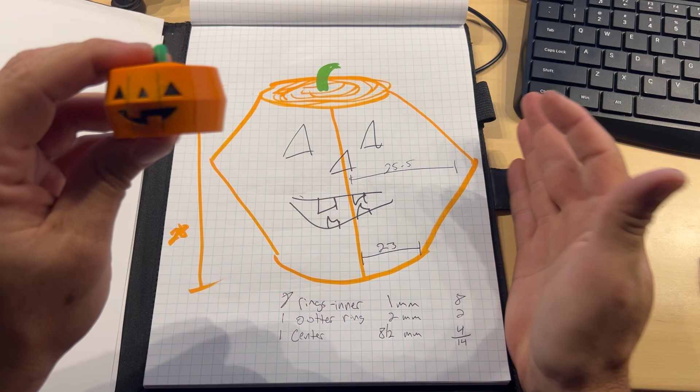First of all, I am no artist, obviously. So just some basic measurements from here: it's 28 millimeters tall, total width was 51 millimeters.

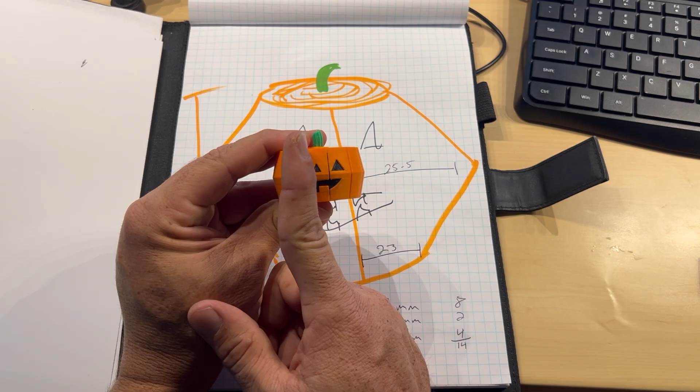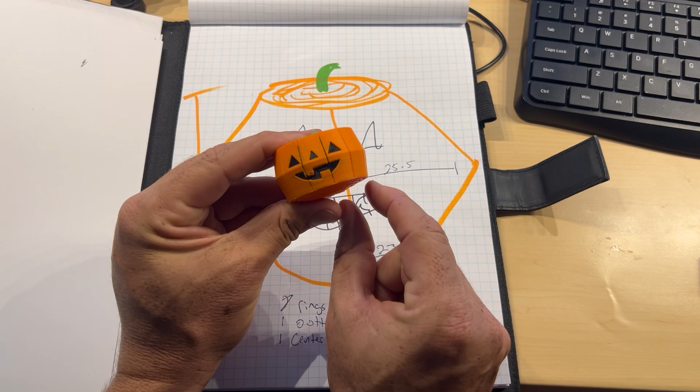We're going to be working on just a half, and I'll show you on the next page how we're going to build this thing out. But we're just going to need radii - I don't know what you call them. Middle is 25.5, bottom and top are 23.

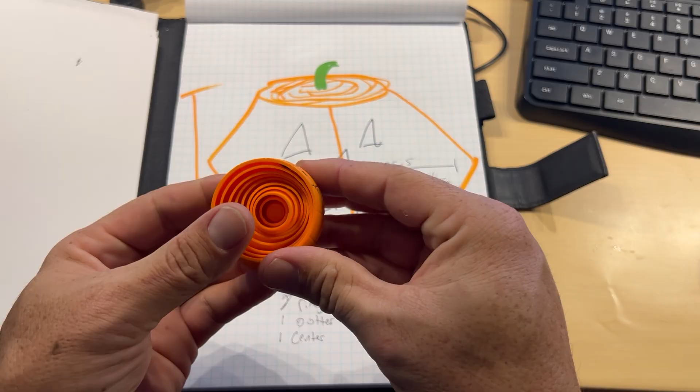Each of the 8 rings - it's got 8 inner rings. Let's look at it from the bottom. There's a center post, which is thicker, and that's also what the stem is connected to. And then there's 8 inner rings and then an outer ring.

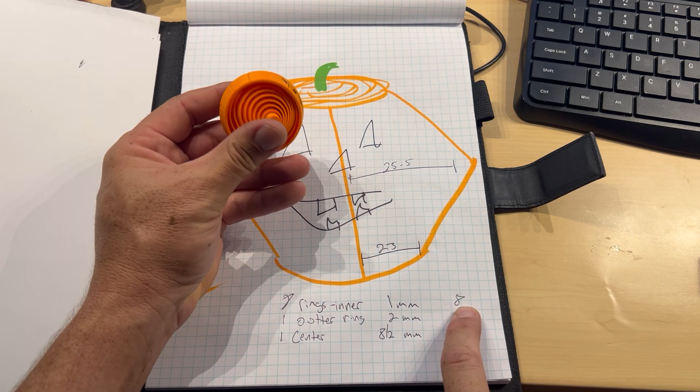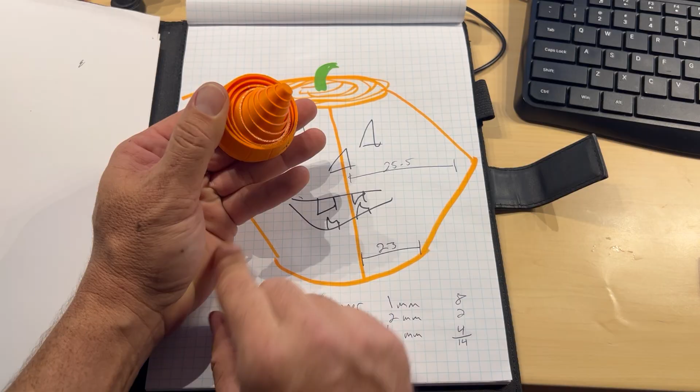I'm making a differentiation because it is thicker. So the 8 inner rings are 1 millimeter each, for 8 millimeters total. 1 outer ring, 2 millimeters, 2 millimeters total, and 1 center ring - the diameter on that is 8 millimeters. Since we're just working with the radius, it's 4 millimeters. So total...

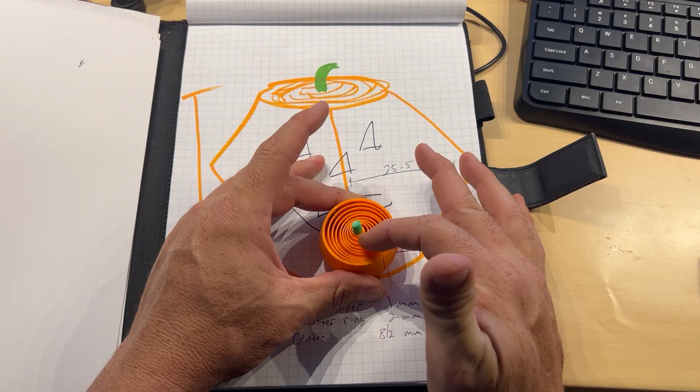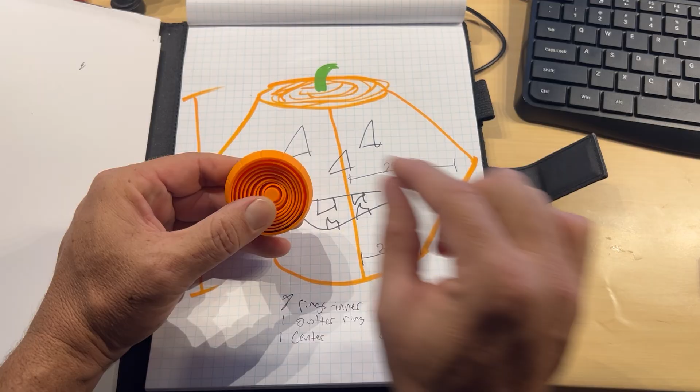As I'm trying to dimension this, I need to figure out what my empty space and spacing is between each ring as well. The way I figured that: my 23 that I measured for the bottom radius, subtract out all my solids that I know, which is 14. 23 minus 14 is 9 - that's also how many empty rings there are. So my gaps are 1 millimeter gaps.

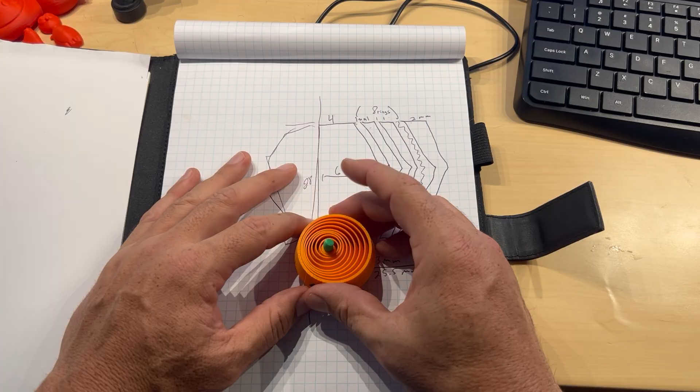Let's take a look at the next page and I'll show you how I'm going to be making this. One way you might think, if you're familiar with Fusion - this is where I'll be making this - you can extrude, start out with a bunch of rings and extrude it up, but you're going to have a problem because you can taper the extrusion, but it's going to be very difficult to get all the different rings extruded.

You're likely going to have to actually do an offset plane and do lofts, then do another offset plane and do lofts back in. So what we're going to do instead is a revolve.

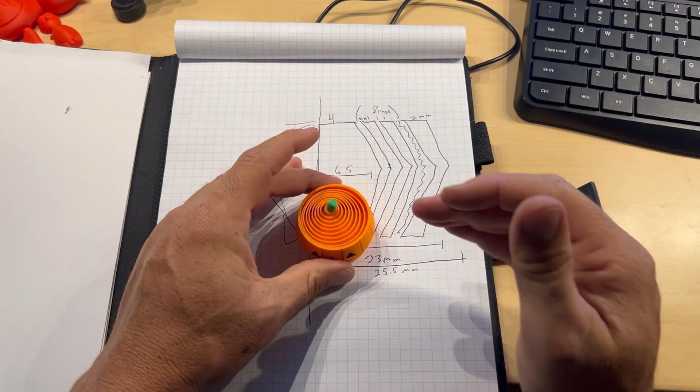That's going to take - what this picture is, basically a cross section cut this way, so then you're looking at the front of it. This is the center post, this is the outermost ring, and then it's cut again this way. What we're going to do is build these shapes and then revolve it around the center, and it'll build rings.

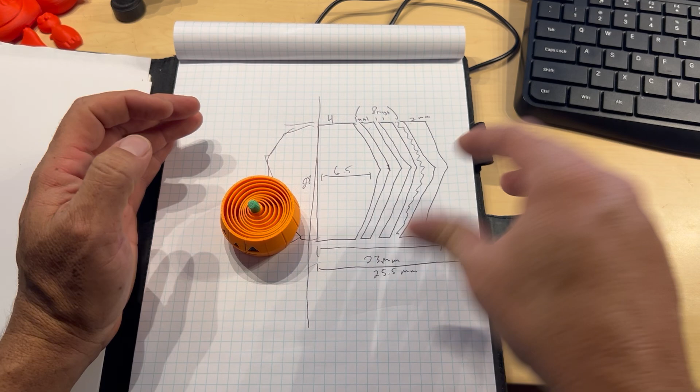So we're going to start our sketch in Fusion from the front and basically do it as a cross section if we're looking at it that way, and then revolve it all the way back around and make it a big ring.

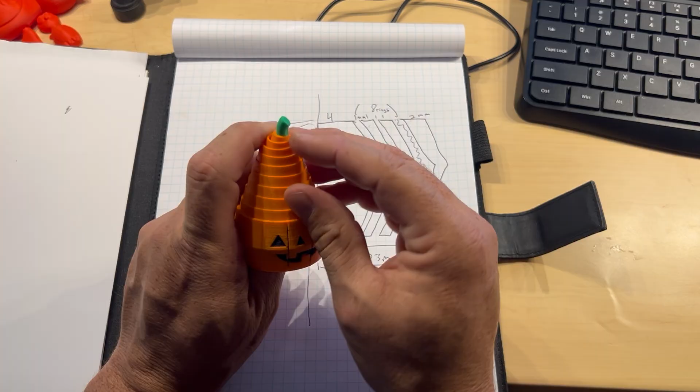Second to last thing is our stem. You'll notice it's a little bit smaller than the center post, so it's a little offset in, and it's also got a little bit of a curve. So I'll show you how to get an extrusion with a little bit of a curve like that.

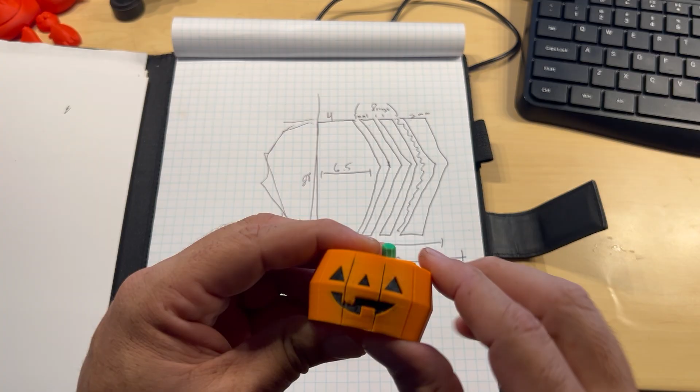And then we need to do the face, which will be an emboss. I don't know how they did it, but it didn't work right because I couldn't get it painted right - and that's not just bleeding, it was actually part of the printing. I don't know what happened, it's weird, but it didn't show up in the slicer as being black. So who knows? Anyways, I will see you over in Fusion.

Over into Fusion, I have it opened up, and I also brought our diagram in. That's over in the right-hand corner, so I'll have that there for reference. I'll turn it off a little bit later when we're done with the initial drawing part, but this is just so we can get our drawing going.

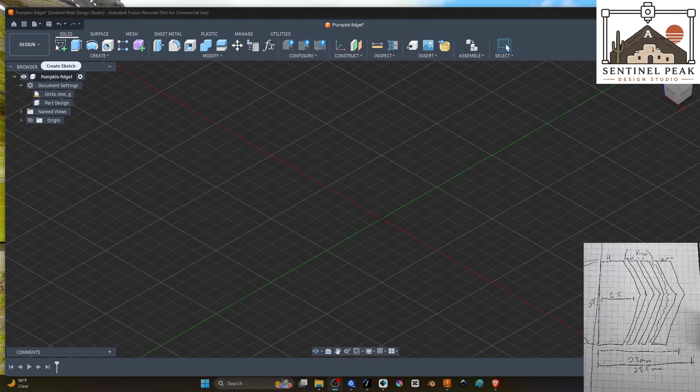First thing we want to do is create a sketch, and this is going to be on a front view. So normally I start on the bottom, but we're going to be looking at this as kind of a cross section.

All right, start off with some lines. This first line, we don't need it to be a solid line. This is going to be what we revolve around when we do our final revolve after we draw all our shapes, so let's use this as a center line. That'll also help us down the road when we add the stripes on the side, since we're going to do a pattern around the outside of the pumpkin to add some stripes. So this will help with that as well.

So our center line, this was 28 millimeters, that's the height of our pumpkin. Now we do want to switch to some solid lines because this is going to be starting with our body, starting with that inner kind of plug, and that was 4 millimeters off the top, 4 millimeters off the bottom.

Now I want to do just a quick construction line, find my center. We know we were 6.5 millimeters. There we go, 6.5 millimeters. Each section is going to jump out 2.5 millimeters, so that's just a construction line for reference. Now let's do our solid line.

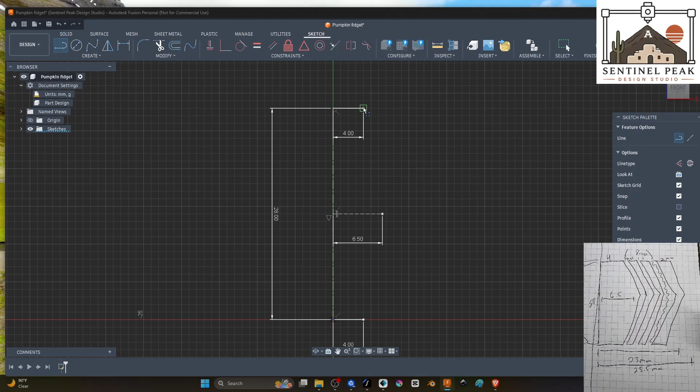So let's switch over here, or hit X to toggle it. Go there - because we hit a point, it stopped my line, so restart it and go there.

Now, even though this wasn't a solid line, the center line still acts as a line to complete our body. If it was just a construction line, this would not be solid, and we would not be able to do our revolve around it. At least I'm like 99% sure of that.

Okay, let's start. Let's do our outermost line. And if you look down at our diagram, the lower two numbers, the 23 millimeters, that was to the outside of the bottom of the pumpkin. So that's the radius from here to the outside. It's also the same at the top, but let's do this as a construction line in the center, 28 millimeters. Go ahead and place that.

Same at the top. Whoa, that did not stay straight. Okay.

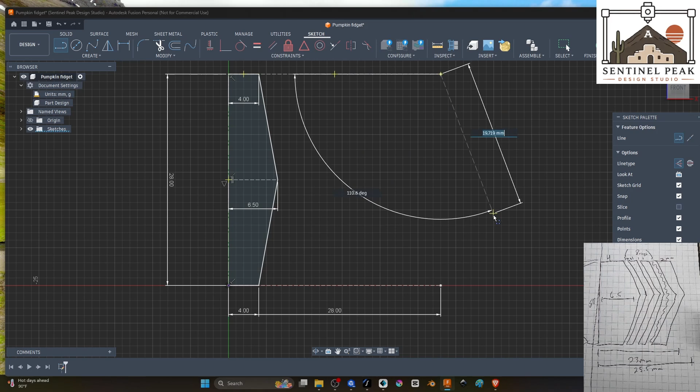And then from the center was 25.5. So let's get 25.5. Why do these... what did 28? Not 23. Try that again.

23 millimeters, right angle, and another one up here on the top. Go right there until it stops us. Put our check mark. Okay, let's do our outer line.

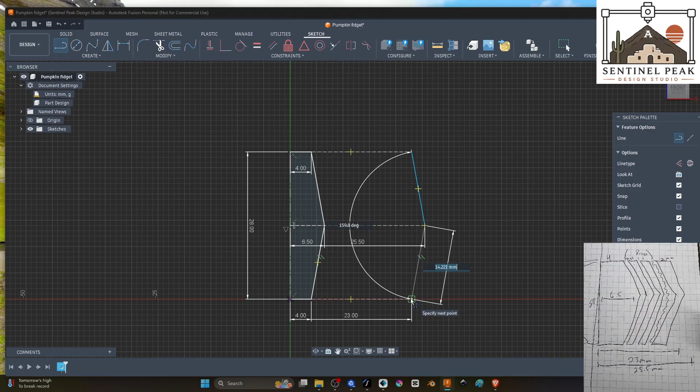Remember, this outermost - if you look down at the right, the outermost ring is 2 millimeters thick. Let's change that to a regular line. The outermost was 2 millimeters thick, it was 2.5 millimeters offset. So we need to do that, and then we need to make another line right there, 2 millimeters. That should snap at our same degree.

It's going to be much easier to copy this, paste, grab this, move it over 2 millimeters. Okay, let's just draw our line across. Now we've got a solid body, so that is our outermost. We have our innermost core and then the outermost 2 millimeter.

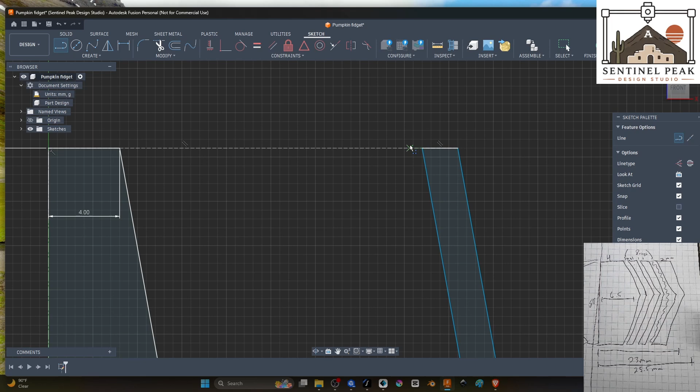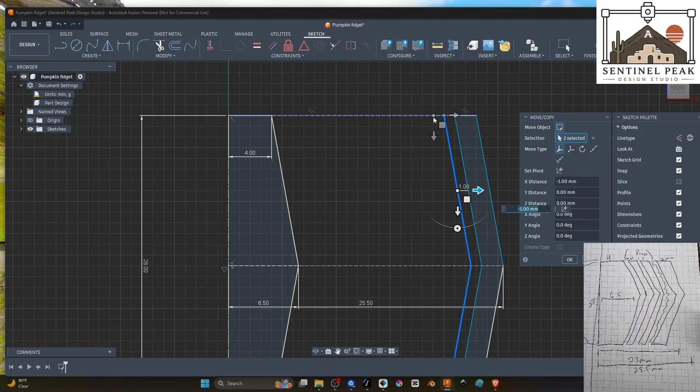Now in the middle of here, we've got 8 1-millimeter rings, and the first one's going to start offset 1 millimeter. I'm just going to do this again - let's just take these two, copy, paste. And this is only going to go over 1 millimeter now. So all of our 8 from here, we got 1 millimeter spacing, 1 millimeter lines. But we're only going to do our first one, and then we're just going to pattern the rest all the way across. So this first one's 1 millimeter.

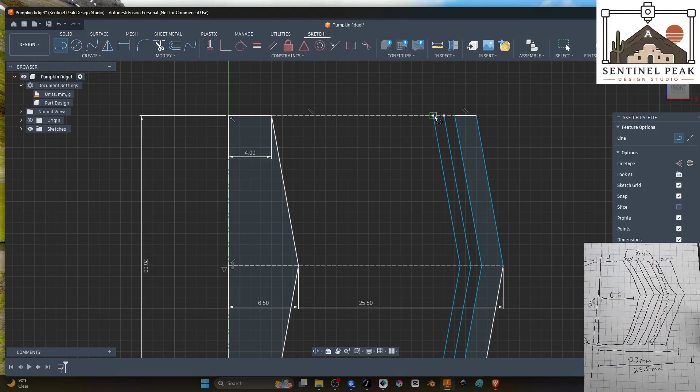1 millimeter, so now this gives us our thickness for our first ring. Now we're just going to copy this one 7 more times, do a pattern all the way across here and fill it in.

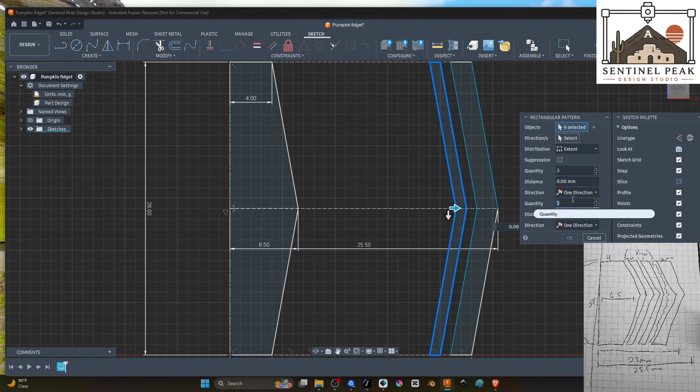Let's escape from that. If I double click this, it selects the whole ring. And then I can go rectangular pattern because we're just going across, and I need a total of 8 of these. No, not that way - this one, 8. And then we just drag all the way across.

So now I've got my outer 2 millimeter, and then 1, 2, 3, 4, 5, 6, 7, 8 inner, and then my core.

Take that construction line, I don't need these construction lines anymore. I do need the center line because now we're going to do our revolves.

So start with our core, and this is pretty simple. Let's finish our sketch, just click in that. And if you don't have it right here on your shortcuts,

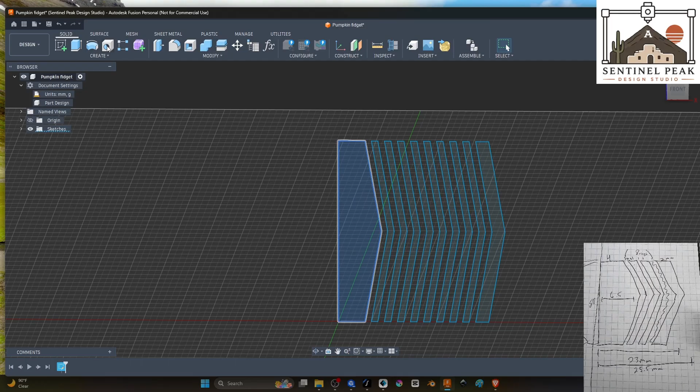in here and revolve. Now see what that did? It took that profile, that shape we drew, and it took it in a ring all the way around the center axis that we set. That center line.

revolved at 360 degrees. If we wanted to do something else, we could adjust this however we want, but we want 360.

Now, we can't do them all at the same time, we're going to have to do them individually, so I'll speed through this. But one important thing, this first one is our first official body, so it is a new body. Future ones, we're going to do join, so we only end up with one body. So each of my next revolves I'm going to go through in fast time, but each of the following ones is going to be a join.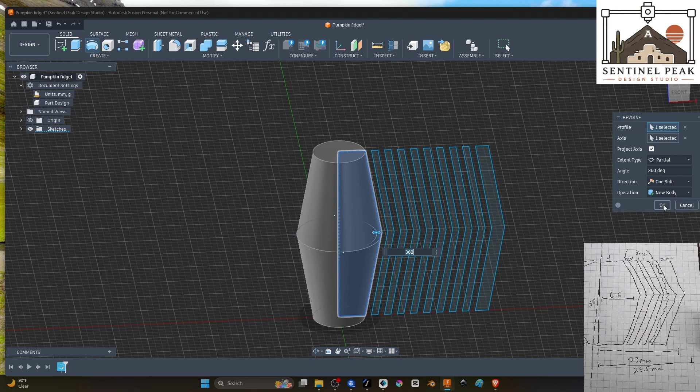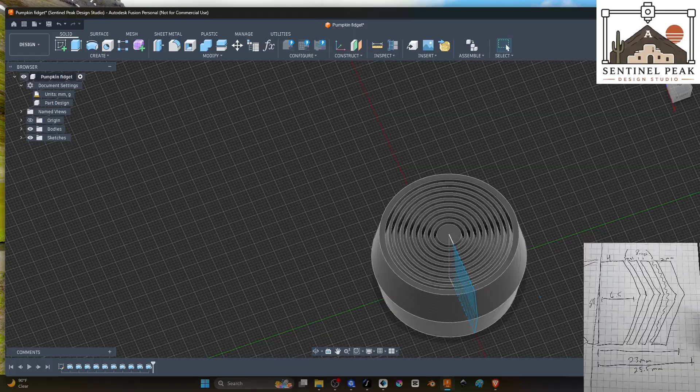Okay, we now have our full fidget. This will work just as it is, you can print this out. It is one body - export this, save it as a mesh, and you are done.

If you want to make it a pumpkin, we can make it a pumpkin. That's what we're here to do. So...

First thing, and from here, there's actually quite a few ideas to think of how it opens. You can make it a Santa hat and make the outside red with the Santa face on it or something, or just do even the colors, make it white around the top, and who knows - you can do other stuff with this.

But let's go ahead and extrude out our little stem. Actually, yeah, let's go ahead and do that. All right, so all we're gonna do, and this is fairly simple, we're gonna create a sketch on here.

We want it a little bit smaller, we don't want it to come out to the whole ring - you can if you want. I'm going to do 5 millimeters. The whole diameter is 8. Let's do 6. Okay, while we're in the sketch, we're going to use the revolve tool again, but we're not going to do 360 degrees this time.

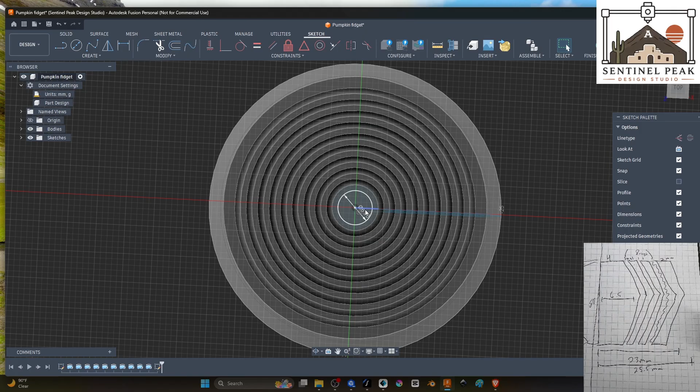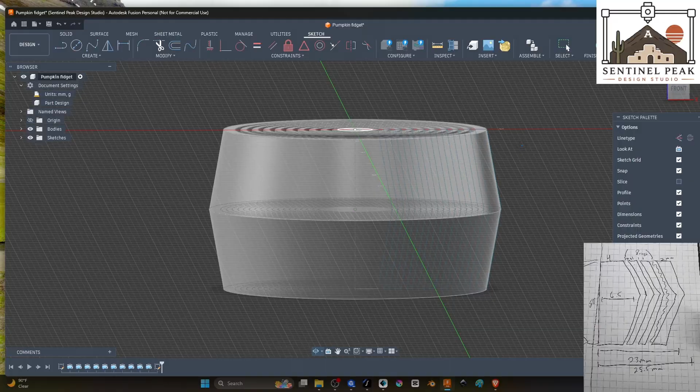We're going to revolve this up and out. So think of it like this: it's going to come up and out and curve. So we're going to do an extrusion, a revolve extrusion, and we want to curve around an axis that's out here. Just like these outer rings revolved around this axis and they made a curve, we're going to do the same thing, but set it far so it makes a big axis. It doesn't curve quickly, and you'll see what I mean.

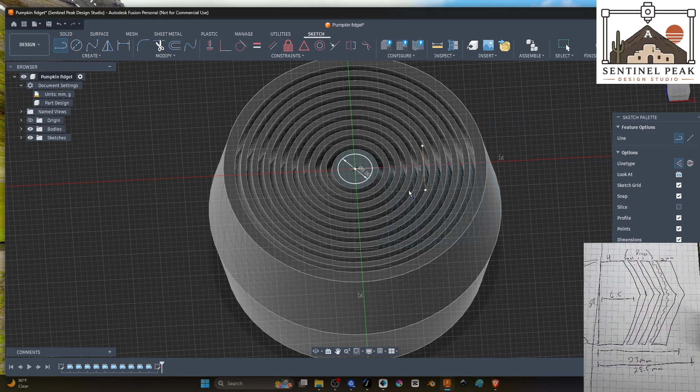So we're just going to draw a construction line and put it out here a little bit. Now let's finish that sketch just like that. Revolve it.

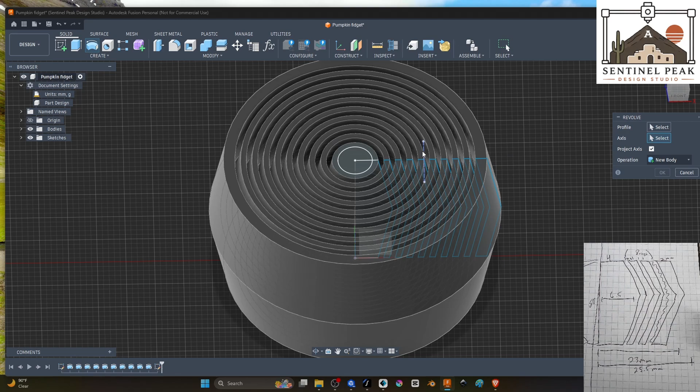Cancel that, sorry, let's do revolve first. Axis, we're not going to use that axis, we're going to use this. And our profile is this.

Now, if you look, it is showing as a cut because it's set to 360 degrees. And earlier when I mentioned you can adjust it by grabbing the handle, because it goes through solid bodies, it thinks it wants us to cut that. If you notice over there, as soon as we take it out, it loses the cut. And now look, as we bring it back, we have a little stem. And it used this curve.

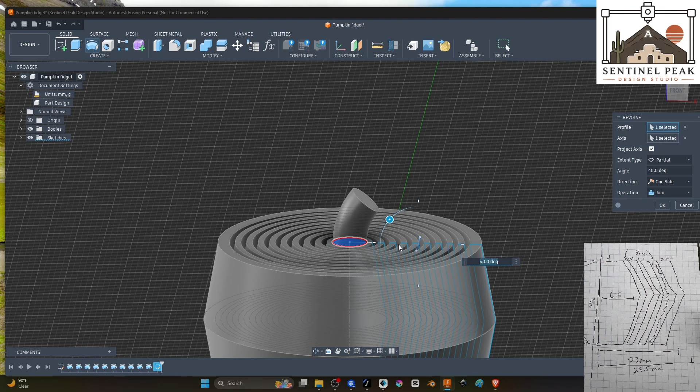So if you want it to be even a gentler curve, you bring this out further. You want it to be a sharper curve, you bring that line in a little bit closer. And it takes that extrusion and revolves it around. Pretty cool little trick. We want to join that, and that's done. Let's hide some sketches that we don't need anymore.

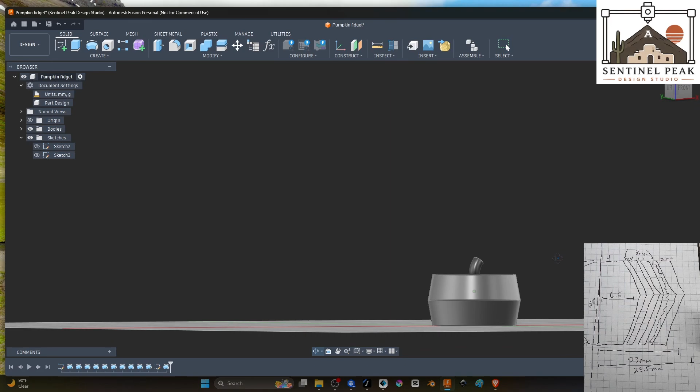Okay, let's put some rings on it. So we need to make a cut into this.

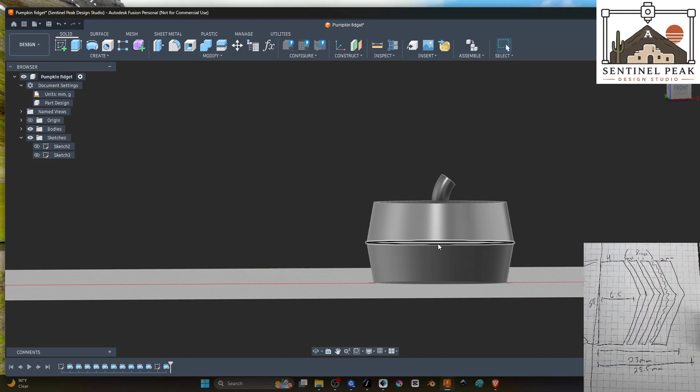What we're going to use is an emboss, just to make a thin stripe into the side of this, and then we're going to do the pattern around. Now, the problem we've got is when we go to do an emboss, because these are on different planes, at different angles here, we're going to be drawing on a plane in front of this and emboss the shape onto these bodies.

But it can't go around a curve, so we're going to have to do a kind of double emboss. You will see what I mean in just a moment. So let's go ahead—oh, one quick thing before I forget.

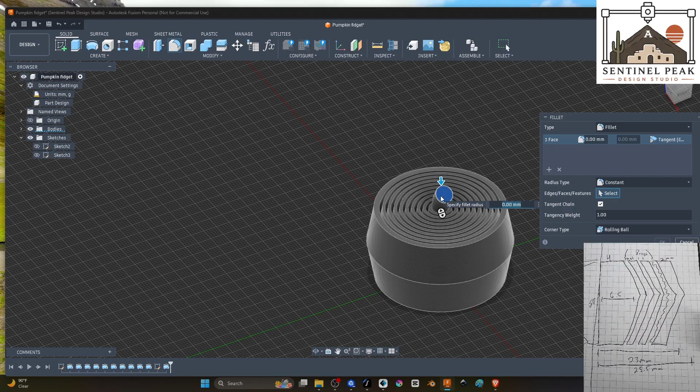Highlight that, hit F for fillet, and hit a 1. That rounds that curve a little bit.

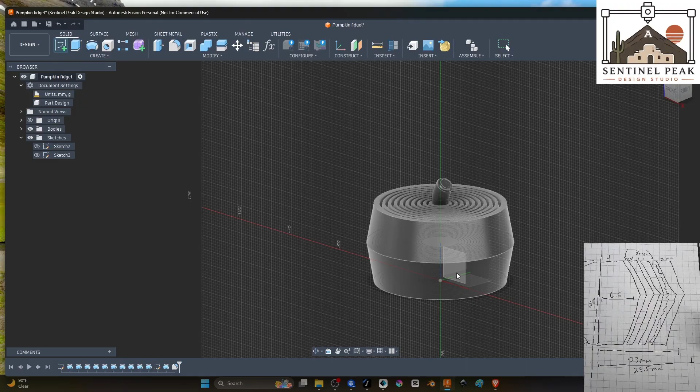Okay, now let's do our sketch in the front. To create a sketch in the front, if I try to make a sketch right now, I can't draw directly on this body because it's not flat. I can choose one of those planes, but then it makes the emboss difficult out here.

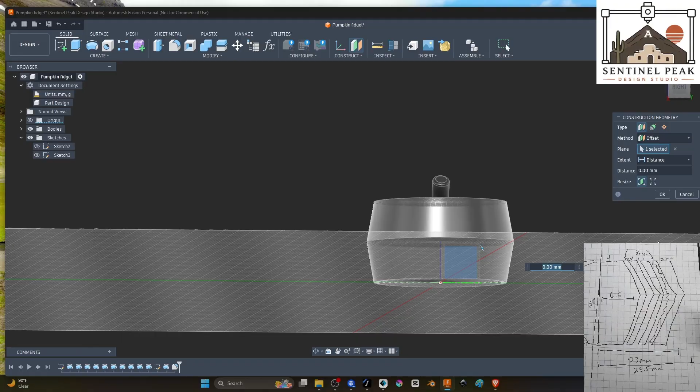So I'm going to do what's called an offset plane. And I'm going to use this as my directional, my plane reference, but I'm going to actually bring it out in front of this. Now this gives me a new plane to work on to draw.

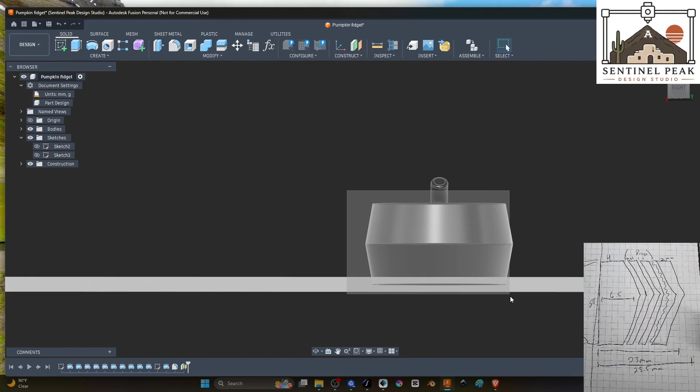So it's off to the side right now. All you need to do after you hit OK is highlight it and grab a corner. Doesn't really matter what this looks like, we're going to draw a sketch on it. But you can adjust that plane to kind of see if it's where you need it.

Now we draw a face. I'm just going to be quick, not going to do anything fancy—we're going to emboss this on it afterwards. So just do a triangle.

We do have a center line from our sketch, so just mirror that on that center. Another little triangle for the nose.

That is too high with our center point down there, so let's do those down there.

And then let's do a center line so we get it even from the middle. This is going to be the top of our mouth.

Make sure we stay flat. I made him kind of narrow-eyed, I think, but it's all good. You can do whatever you want for the face—I'm just doing it quick.

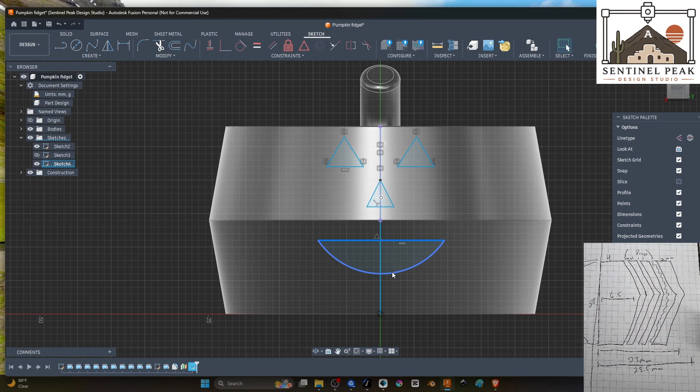Put a mouth like that. And want to move these down a little more so it takes up more of the bottom.

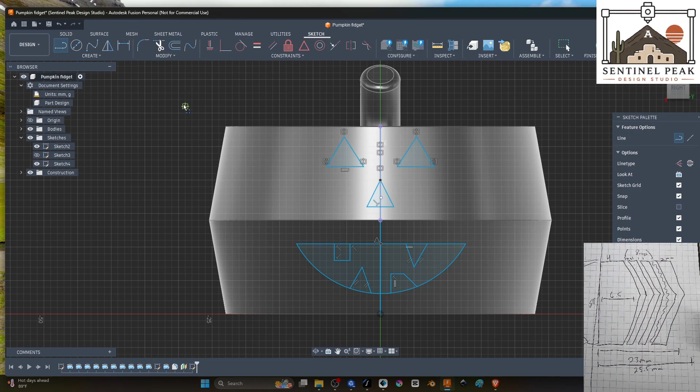Okay, now we can draw in a couple teeth. Make one sharp, and do that one weird—make him goofy. Okay, let's emboss it.

So notice now our drawing is in front, and we're going to emboss this onto our shape. We can either do this—so let's go ahead and hit our emboss tool. Finish our sketch, sorry.

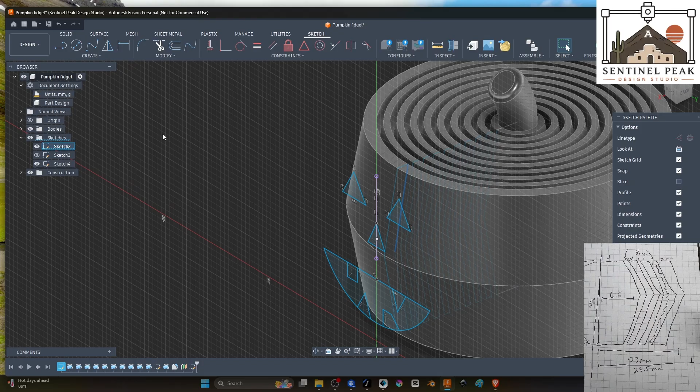We can hide our first sketch, we don't need that. So we're back under our solid menu. Go to emboss. Under sketch profiles, we can only do half of this at a time because of that curve I mentioned.

So we're going to emboss the top half first. For our face, I've got to select a face—if I selected this, I can only select one face anyways. If I selected down here, it doesn't match up, so it wouldn't emboss correctly. It doesn't line up.

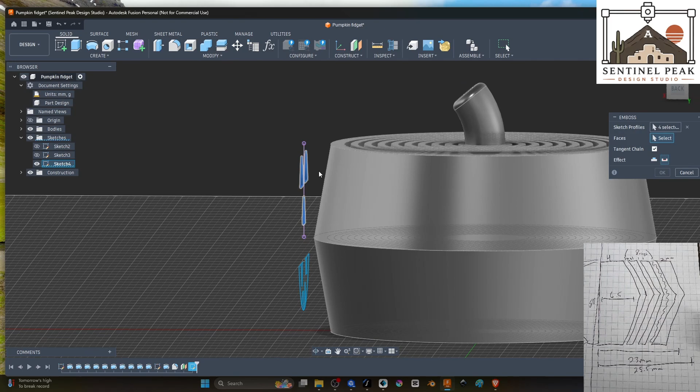It basically imprints it directly behind where it's at. We've got it set to a deboss. Emboss means it's going to come out of the face and stick out whatever we set—right now it's set to 0.5. A deboss is what we want, like a jack-o'-lantern, and that cuts it in.

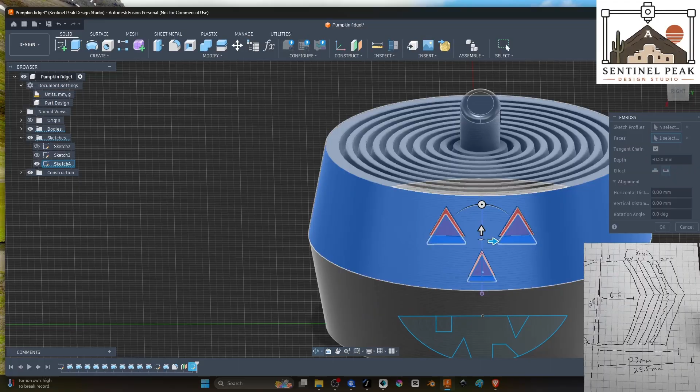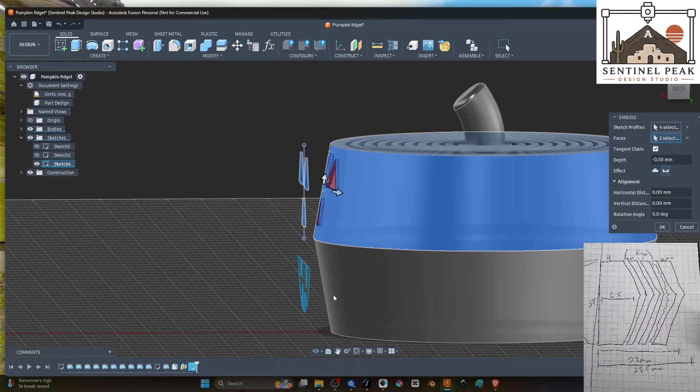We want to go 0.5 millimeter—you can do whatever depth you want. These are greater than 45 degrees, so you won't need any supports on the top half at least. If you go too deep on the bottom, you've got to worry about supports because it's already an overhang, and if you cut in too deep, then you're really hanging over. So I'm just doing 0.5 millimeter—go ahead and hit OK.

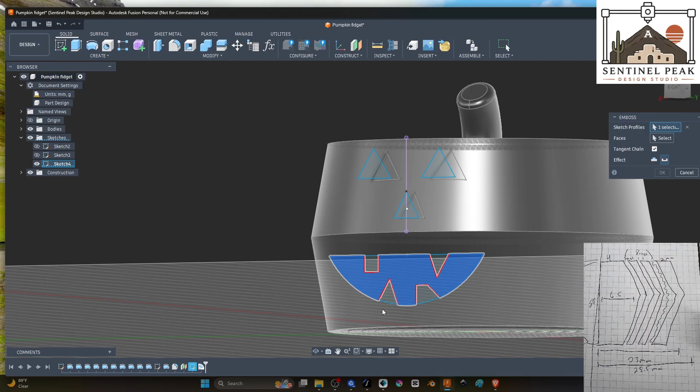Now we have our holes, and I'm going to go ahead and do the same on the bottom. I cut the teeth out, so it's not selecting those, it's just going to leave those as the regular color. It's fine. Select our face.

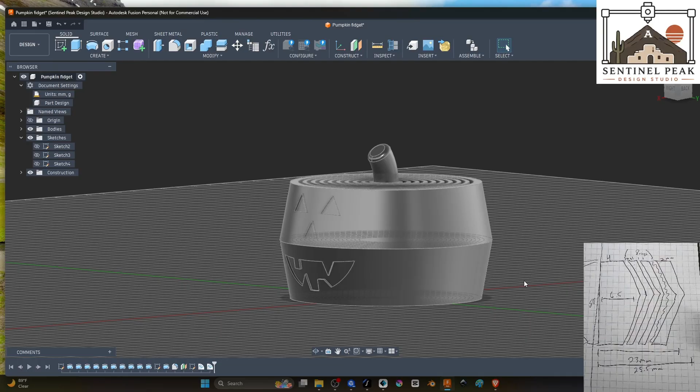This time it's the bottom, 0.5 millimeter cut, deboss, and go. Now we can turn off that sketch, and we got a jack-o'-lantern. This should have been done over here to look better with it on the side, but once you print this thing, he's kind of derpy, but it's all good. His teeth match. Once you print this thing, it spins freely in the middle anyway, so it doesn't matter which way it's pointing. All right, let's add some stripes on here, some ridges I guess we call them on a pumpkin. Do another construction plane on this side.

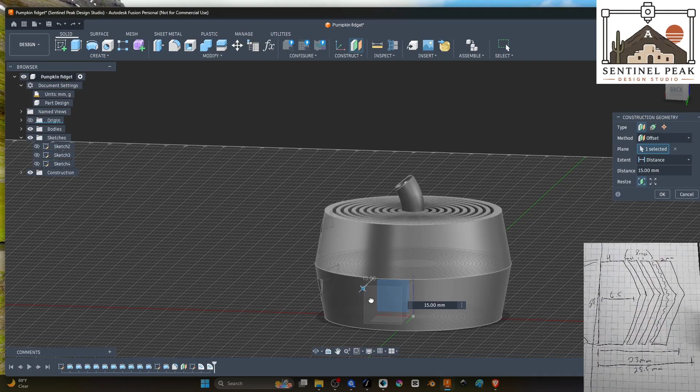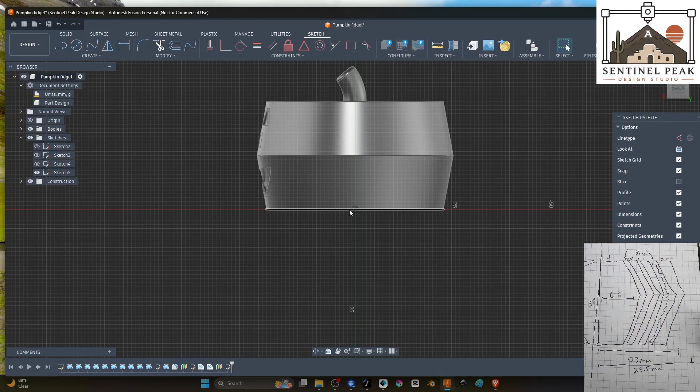Bring it up. Want it pretty close to it. Looks pretty good. Our sketch, now we're just going to do the same thing. We want to do this right on this center now.

Create our 2-point rectangle, start plenty below, and our width - so tabs, we get our width is 0.5. I know it said it, but now it's locked in, you see the lock on there. And go a little above. Okay.

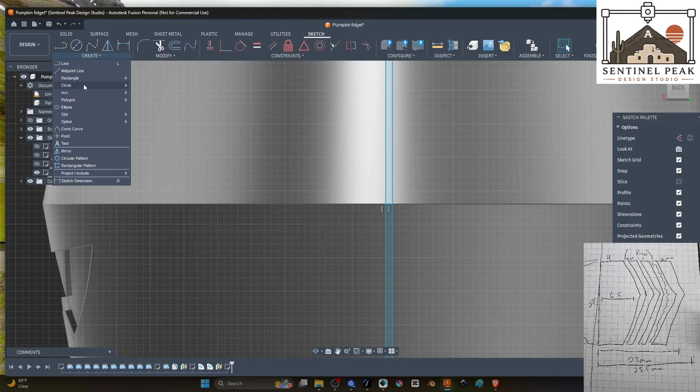Separate it. Now we've got our two separate areas. Finish sketch. Select our profile, emboss, deboss, select our face.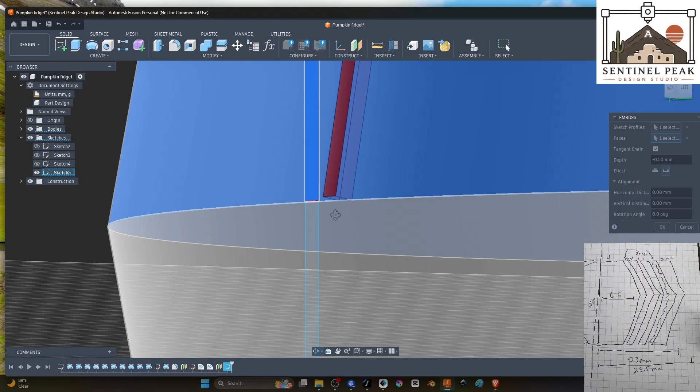And now here's where we need to move it a little bit. So see right there, it doesn't quite meet the center. I have my line drawn right at the center, but it doesn't quite come down to meet it. So I'm just going to drag that down a little bit, and it's going to stop right there at the center. When I do the other one from the bottom, it's going to come up and meet it, and we will have a good shape.

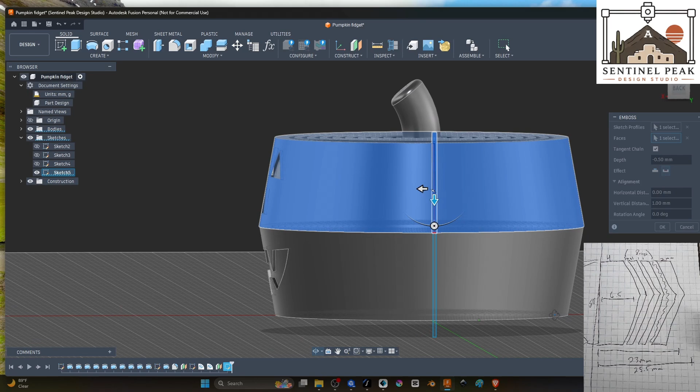Additionally, it should now be straight on. We should be straight up and down. Sorry, my chair must have been crooked or something, I was looking at it crooked.

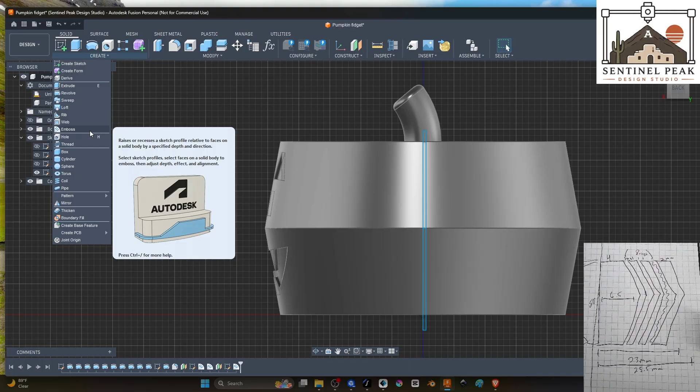All right, do another one for the bottom. Oh, go back in there, gotta move it up. Now if I forget to - see, we got a little piece that's going to be left there in the middle, it's not going to be a full connection.

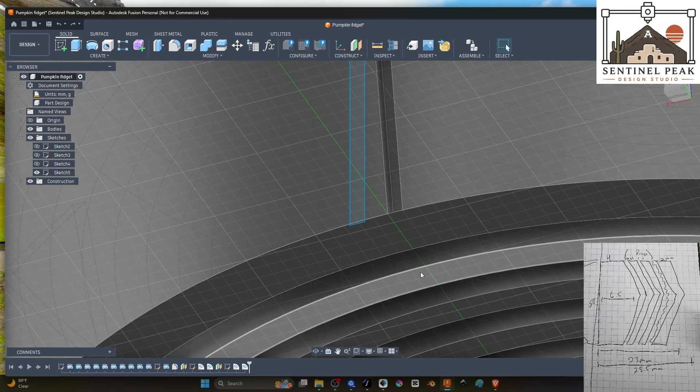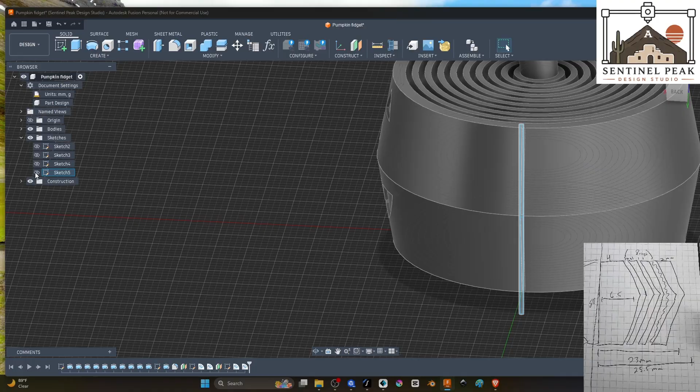Pick that up. Sure that's still fit in the bottom. I'm getting both sides now. Yes, all right. Now we've got our cut. We've got the two embosses, debosses, to make our pattern.

So up here, we're going to go into pattern. We don't want to do the one up here that's rectangular. Actually, you can click it, just change it in here on the menu to circular pattern. Make sure you've got features selected. We're going to be selecting - you can select bodies or other things, but we want to select features so we can select the two features we created, which were the two embosses.

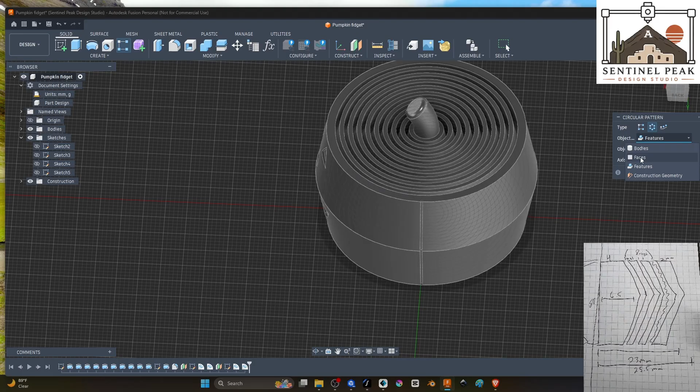Our axis, we want to turn that first sketch on where we've made our center line. Axis, the center line, let's choose our two objects. And distribution - we're going to do this partial.

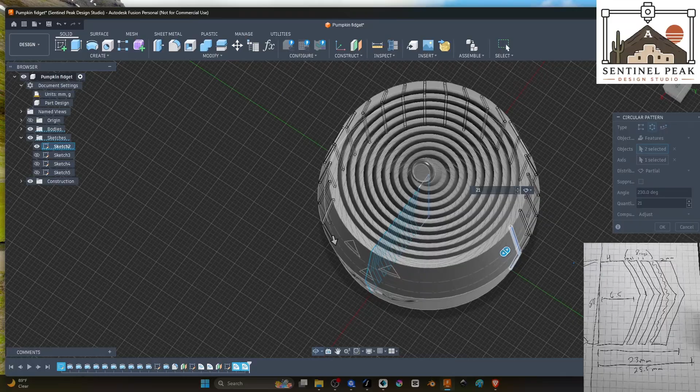So I don't want to go onto the face. And this is way too many. All right, I'll have to come back the other direction as well, but I don't need this many.

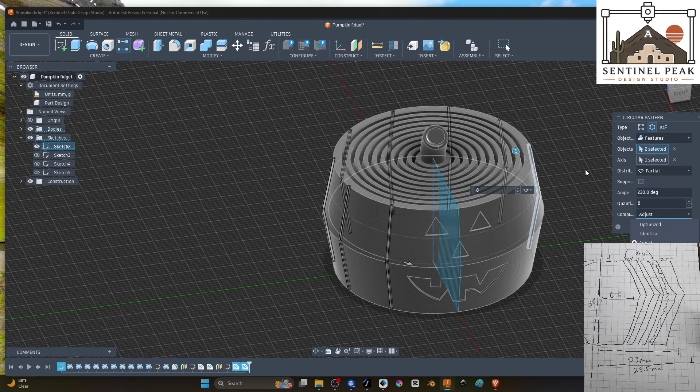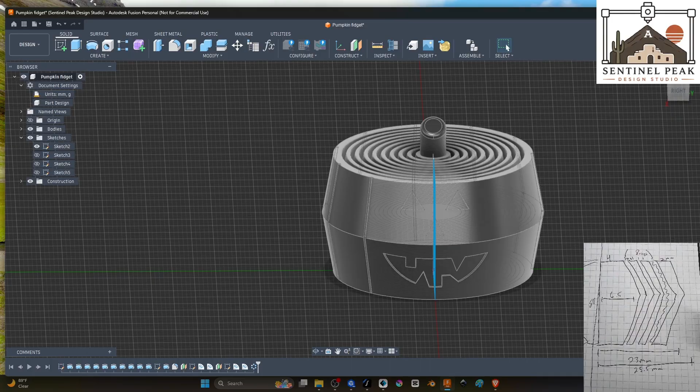What I should have done is done it directly on the back, and then I could have done symmetric and gone both directions all the way around and pinched it into the face. Now I'll just do another pattern. That's fine, circular pattern, get our two objects again.

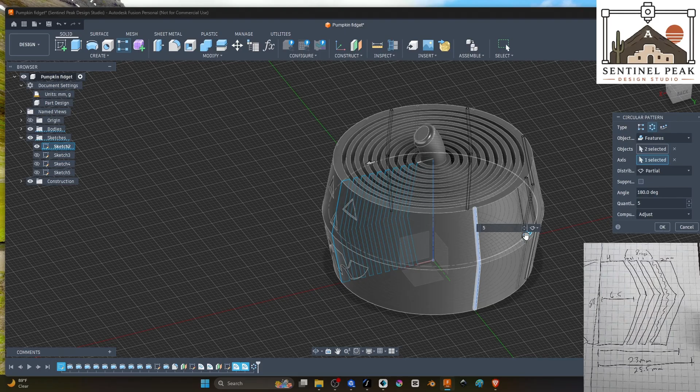Center axis is this, and full partial. There we go. Okay, I got there eventually. I think that looks pretty even.

It's a little off on that side, but what I should have done, and if you guys want to do this, make your sketch, make your offset plane on this side and draw it right in the middle, and then do a symmetrical distribution. That makes it go both directions from your center point. But this works for my purpose.

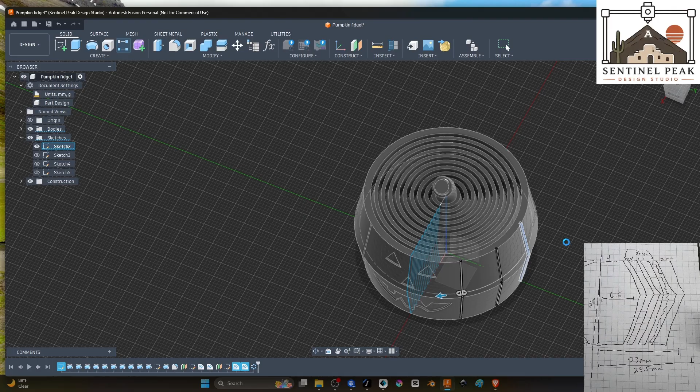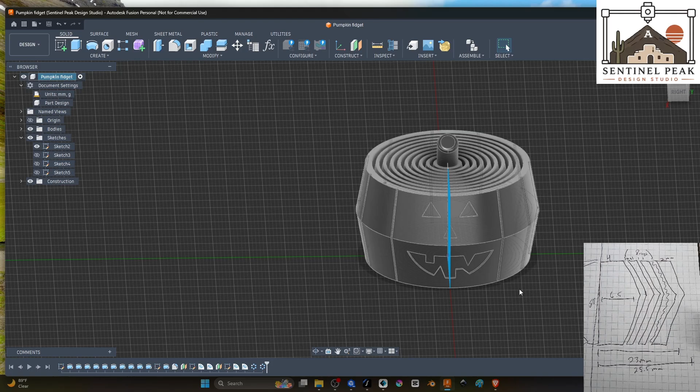And we're done. We have a jack-o'-lantern. Now all we do is save it - I haven't saved it for a while. And then export it to mesh. And then I will see you over in...